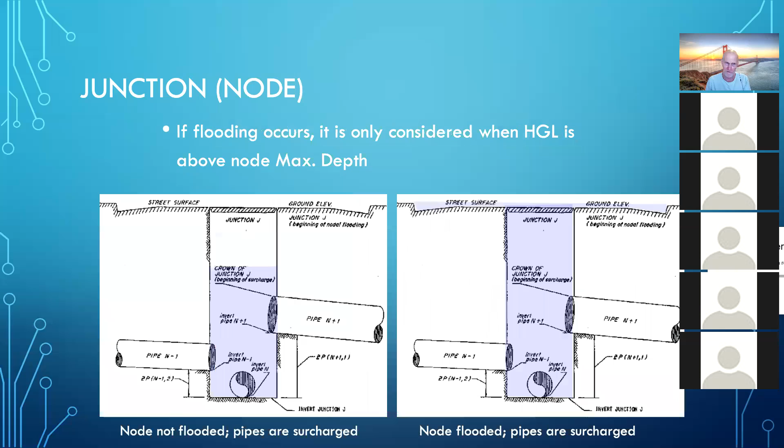Here is a sketch of flooding at an ordinary node. So imagine we have these pipes flowing here, and as the water comes up in the pipe, it goes above the pipe crown or the soffit elevation up into our system. And here they're showing hydraulic grade lines joining different places. In this particular one, here's the rim elevation at a manhole, and the water has come partway up the manhole, but it's not exiting out onto the surface. And we handle that with offsets, and we've seen that already.

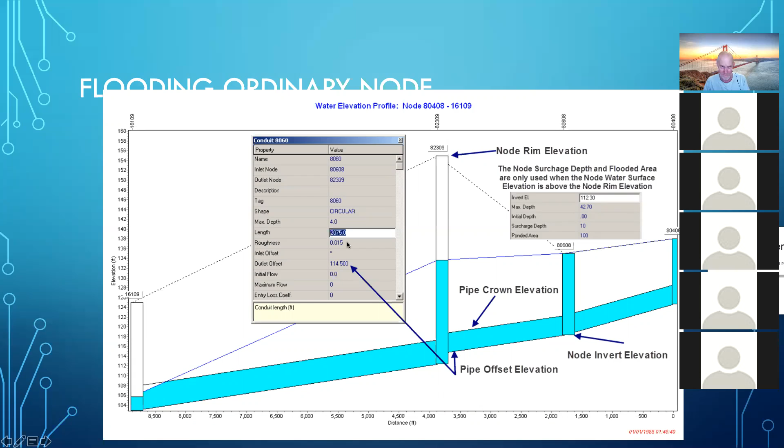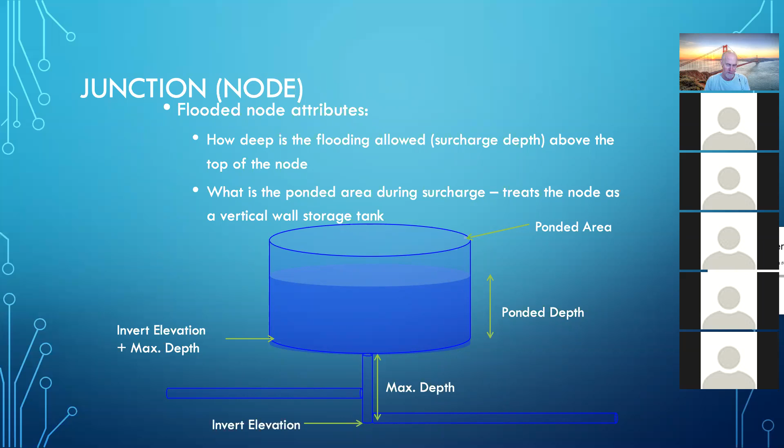Then we go to a junction node where we allow flooding, and that's flipping a switch, and that switch is how deep is the flooding allowed and what's the ponded area. So that's our next complexity of conceptualization. And then we're going to go to a different type of node entirely called a storage unit or a storage node. A storage node explicitly considers storage at the node, and it can include the subgrade portion of the node.

The storage node attributes that we supply are the same as an ordinary node plus a depth-area relationship. We have a choice of a tabular depth-area relationship, which is usually the most useful, or a functional depth-area relationship, which is, in my opinion, of less practical use, but it's okay to start with because we can get everything running and then go back and replace it with a tabular representation. The tabular one's the most useful and probably ultimately the practical one, but functional has its place.

And these can be used for detention ponds, which is what we'll examine today, modeling multiple level inlet and outlet hydraulics, keeping track of riser inlets and an outlet that has a portion through a pipe or a portion over a weir or another pipe at a different elevation. And those bullet items will make a little more sense when we see a graphic.

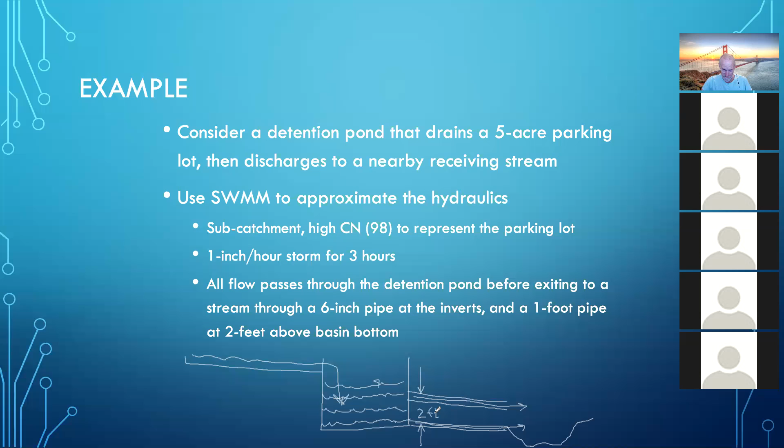Then at some point, the water gets high enough that it starts to go down the upper pipe. This distance, in this particular example, is 2 feet. So that's what our problem statement is trying to express to us. The mental picture here is somewhat important. Sometimes you have to draw sketches like this to understand what you're trying to do.

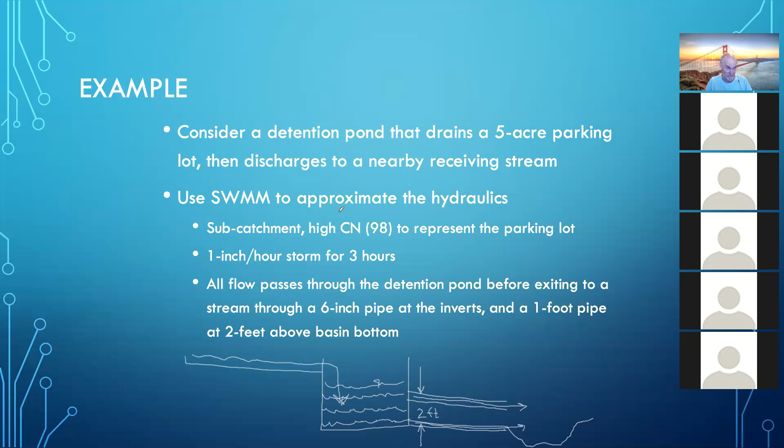In the case of our hydraulic model, we will let these two flows join each other at an ordinary node, a certain distance downstream of the pond, and then make its way to the outfall. So our components are Puffy the Cloud, sub-catchment, a node, which will be our detention pond node, 2 conduits, 1 foot and 6 inch. The 1 foot has at least an inlet offset of 2 feet, and I'm drawing it here with an outlet offset of 2 feet. We'll see if we preserve that.

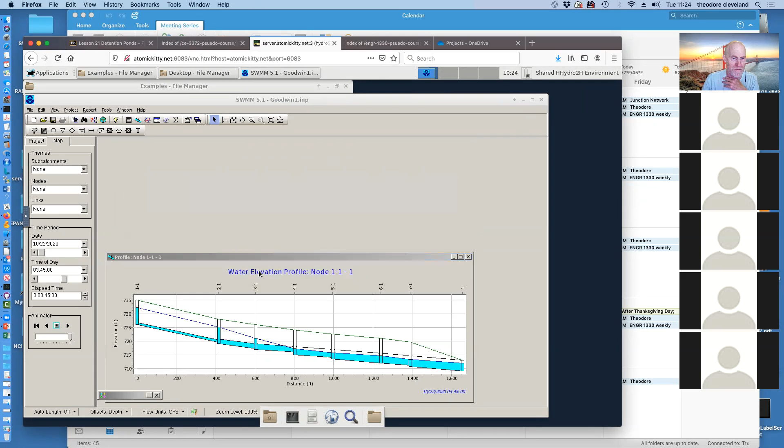Oh, this is not my usual computer. Okay, SWMM projects. Examples. We have example 1, example 2. So let's go here and get those data for the detention pond.

I need the input file. Right click. Okay, how do I undo this? No, I don't want to do that. We just want to download the damn link. That'll work. Make a new folder. There we go.

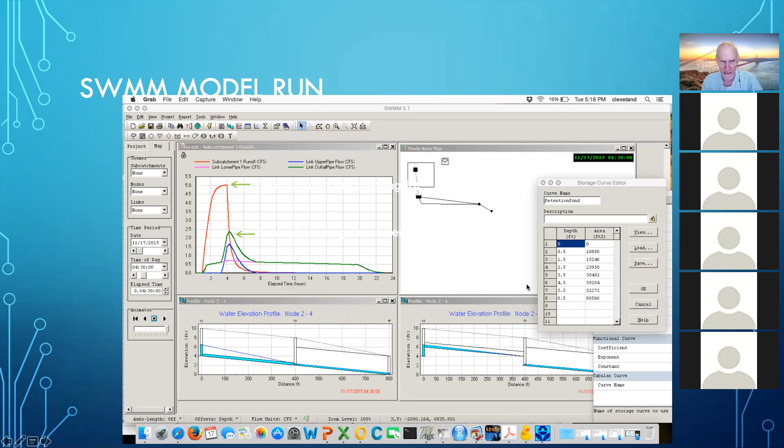Let's look at a different one. You're going to have a homework assignment coming up soon. That's literally this. It's based on a detention pond in Harris County.

For the SWMM program, we need to supply the area associated with different depths in the pond.

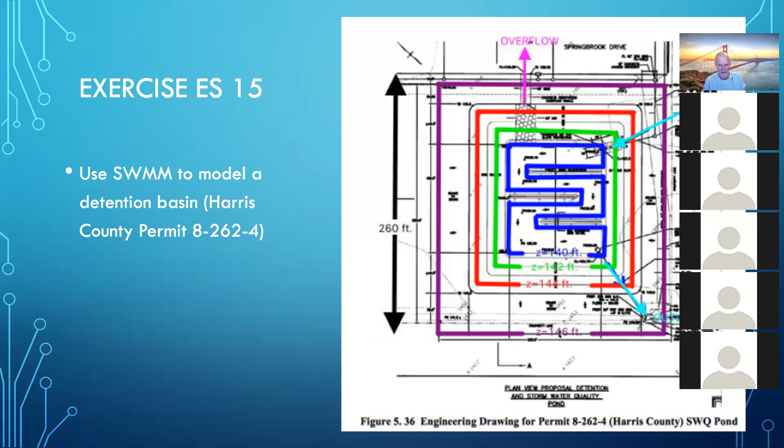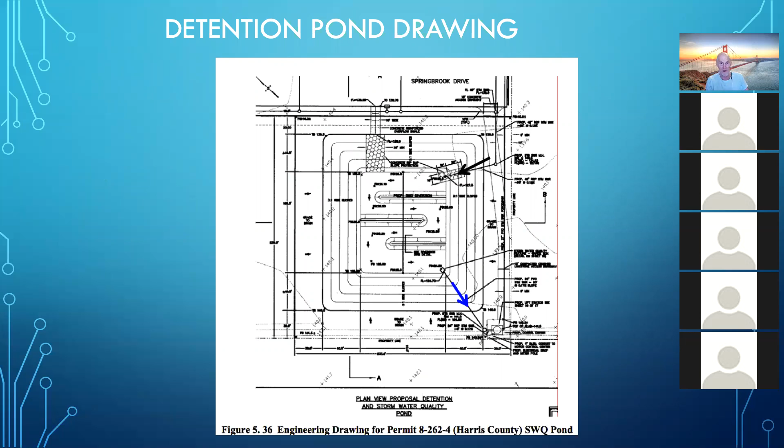In side view, here is a sketch of the pond system. It has a bottom of 139 feet, flow coming in, and then there's an exit pipe at 4 inches, a different one at 6 inches, 8 inches, and then an overflow channel. These values are taken from a problem statement, but the real pond only has 2 exits. Starting from the drawing, this is what we would start with. You have to study the drawings pretty carefully to figure out where the outlet is, unless you have the original drawing big enough to see what's going on. So we have inflow here, outflow here.

We use that to determine the depth area of the pond. The easiest way is to choose an elevation, find the pool area associated with that elevation, and then record the depth and the area. Usually the depth would be in feet, the area in square feet, unless we're doing HEC HMS or HEC RAS, where we'll do the area in acres.

So here's the first one. We have a pool elevation of 140 feet, and the water pool would look like that blue object right there. We would need to measure the area of that in acres or square feet. We measure acres, then convert to square feet, it's real easy.

The tool we would use to measure this area is the same as when we were measuring areas for the hydrology part - Acrobat Pro or something. You just measure the area of the enclosed object in some units and compare it to a known unit, and that gives us the pool area. The nice thing about rectangular ones is you can almost do them on a hand calculator.

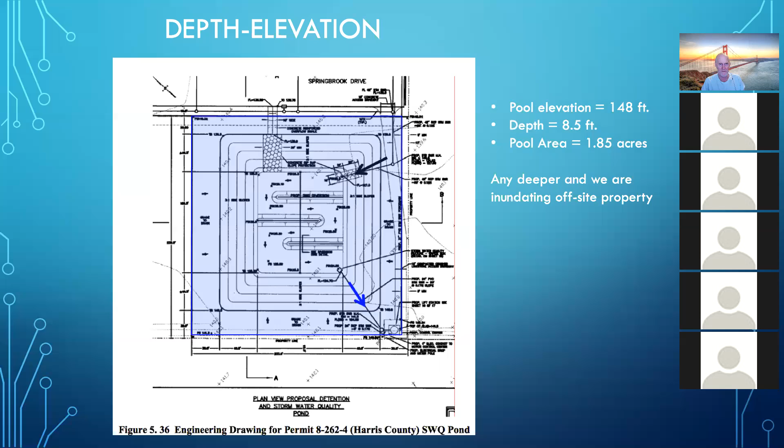So all we're doing is getting the surface area associated with these different water levels. Once we have that, we can enter the information into SWMM and apply rainfall to simulate the pond filling and draining outflow hydrograph.

I think I have that example built already. This one. Okay, it's going to be right there. I'm going to have to remember what the name of it is. Oh, it's not on this computer. That makes it even harder. So let's see if it's on this one.

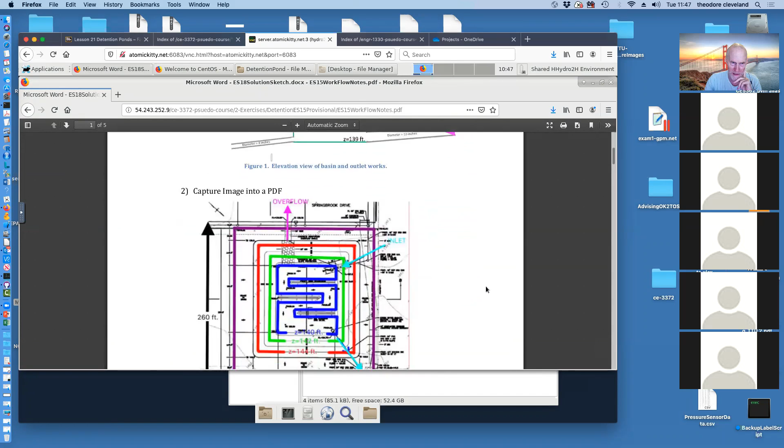Our next step would be to capture the image into a PDF, which is done, and then use measurement tools to find the area of the big square and then the other squares as we move to different elevations. Then we'll make this conversion table - we've measured these elevations, which correspond to these particular depths above the bottom of the pond. We've got an area here in acres, converted to square feet, and we'll put the square feet and depth into SWMM.

So here's our SWMM model, which we'll go to in a second. Then, using some of the problem-supplied values, we can explore the behavior of that detention pond.

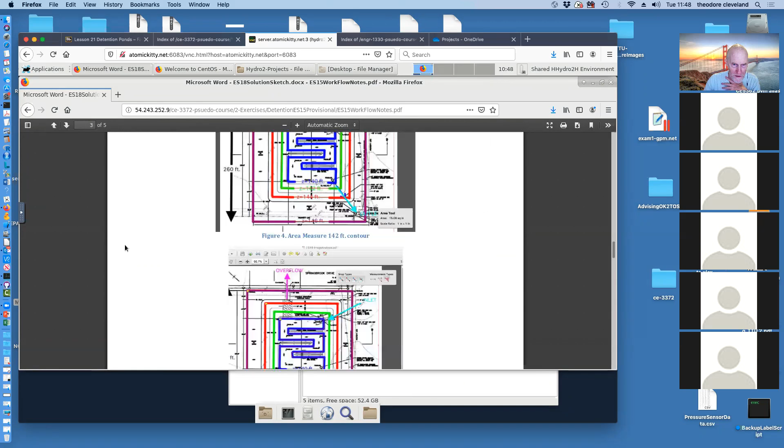Let's create a new folder. I really need to give it the right name. I don't have it handy, so let's go get it back from here. 8-262-4.

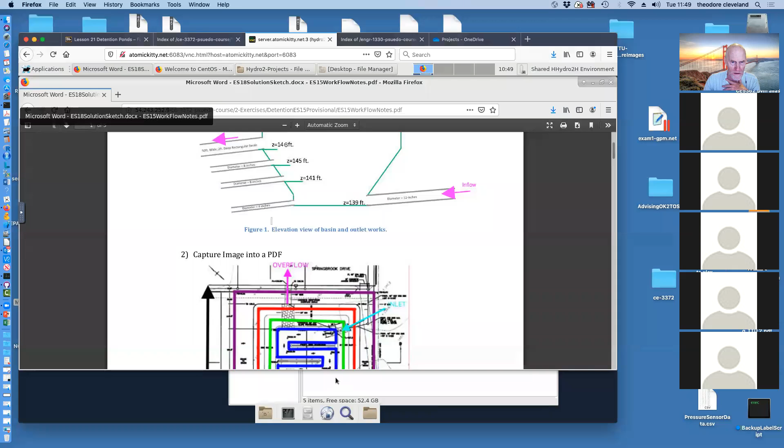Okay, and then we will go and grab the input file. Unfortunately, I don't have a base map to use, otherwise I would, because we can't load the PDF into SWMM and have it work.

Okay, so we'll start SWMM again, and now we'll look at our other detention pond. And there's the detention pond, let's go look at the parts. Now, if we had all the information on a piece of paper, building this is not all that hard.

What we're doing here is economizing on time, we have it already built. If we wanted to modify it, that's not hard either. This gives us the building blocks to make as complicated a network as we need to.

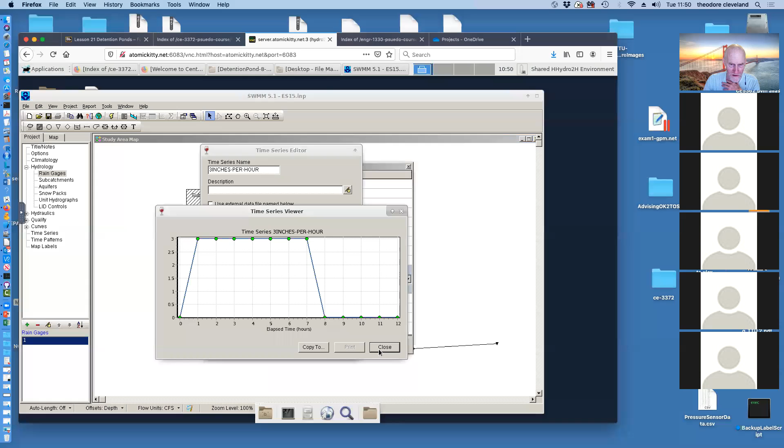So we'll go look at our rain gauge. This is a 3 inch per hour storm for 6 hours. So that's a pretty good storm, even in Harris County that would be uncommon.

And we'll look at our subcatchment, which is a watershed, 9 acres, and this is supplied elsewhere in the problem statement. The percent impervious is taken care of, and that routes to our storage unit.

So you can either consider the storage unit to be the watershed. Actually, this first storage unit is the watershed, the second one is our detention pond. We connect to it through a 1-foot pipe, which I think is what the drawing had. Yep.

Using a storage basin to represent a whole watershed is also a common trick, because that lets us keep storage on the watershed and then drain it into our system, or we could direct connect.

This is the pipe that connects to our detention basin. And if we look at our detention basin, its invert elevation is set at 139 feet. It has a tabular storage curve, we'll investigate that in a second.

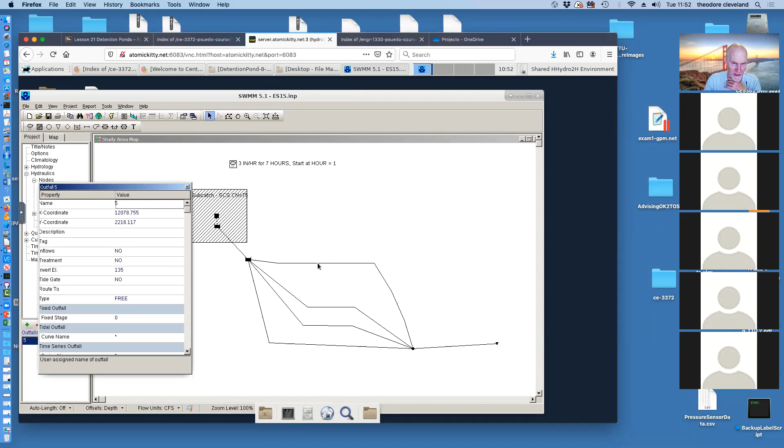And so all this downstream stuff could be changed to fit a broader network. This first part is just to get our detention basin working the way we anticipate it should. Here's the overflow swale, represented as an open rectangular, 2 foot deep, 50 foot wide.

And then our first... oh, somebody has decided to join me. Then our first conduit, our 8-inch diameter circular one. Our second one, also 8-inch circular. Our third one, a quarter of a 4-inch diameter.

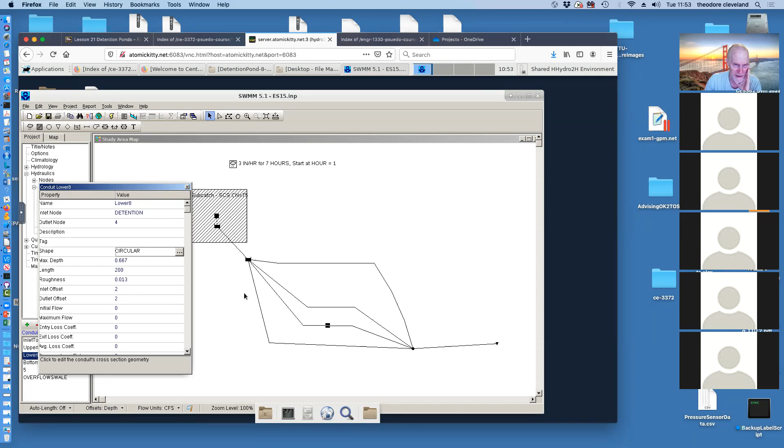And if we examine the offsets, the 4-inch has no offset. The lower 8-inch has a 2-foot offset inlet and outlet. The upper 8-inch has a 6-foot offset inlet and outlet. And the swale has a 7-foot offset inlet and outlet.

So if we were to create a profile, and let's see what it comes up with. It's going to do the upper 8. Should be good enough. Let's do another profile.

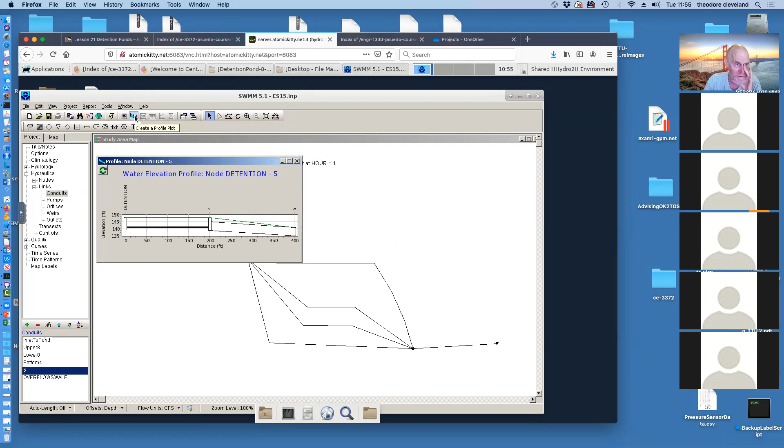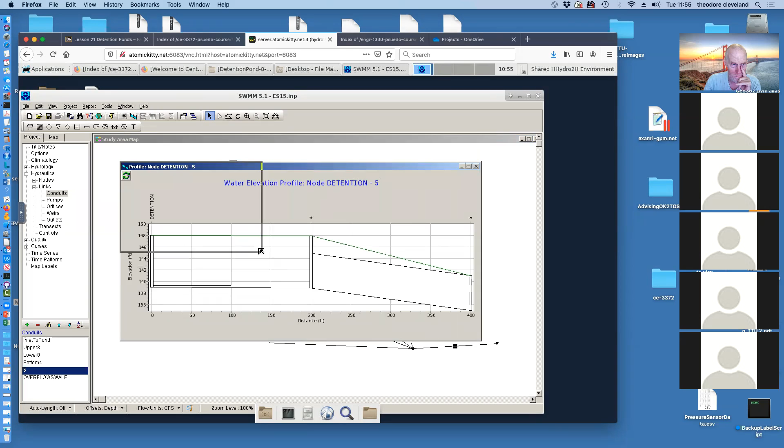And one more profile, we'll get the bottom. So there's our 3 profiles.

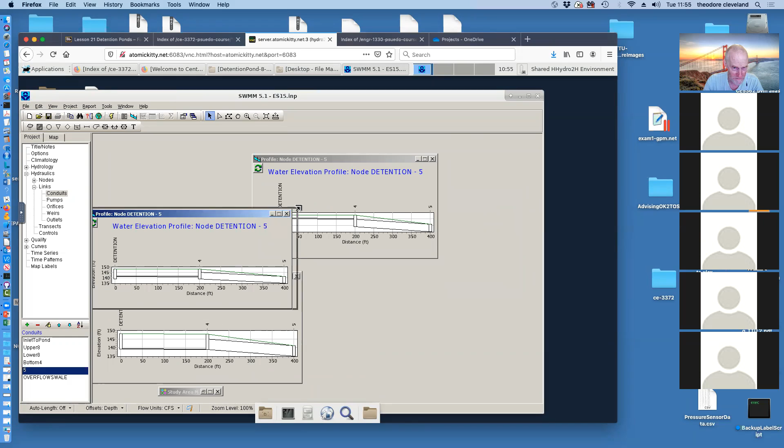And the trick becomes how to organize them so that you can visualize. So that's our bottommost one, let's make it about that size. Our second bottommost one. Then our... all right, that should be viewable.

So now we run our simulation. It's completed. Let's see what we just did before we move on: rainfall runoff, flow routing, dynamic wave, 23 hours with 5-minute and 15-minute time steps, ignoring inertia, Froude number, Hazen-Williams, EXTRAN.

So that's what we ran, and now we'll go. So now our storm begins, rainfall begins. Rain, rain, rain, rain, rain.

And then runoff begins, and you'll notice that our detention pond is taking on water. We can't see this well here as I wanted to. There we go, that'll work.

The bottom pipe is pretty much carrying flow almost right away, which makes sense since it's at the invert. And we don't see blue down here because that pipe is so big, the flow thickness is too low for it to be able to render in the graphic.

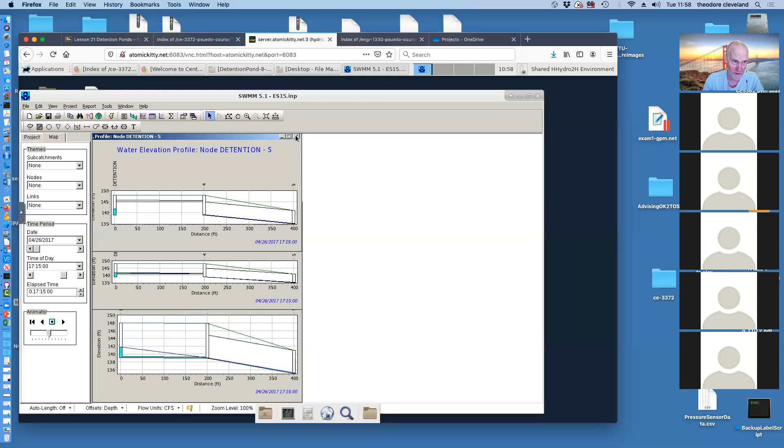So the only real piece remaining would be pumps, and I will find some examples of pumps in SWMM and present them a week from now, Tuesday a week from now, and then we'll move into collection systems. Sanitary collection systems - most of the computational tooling that you would need has been presented. So you had EPANET for pressurized systems, SWMM for open systems, and you've seen little pieces of bigger systems demonstrated.

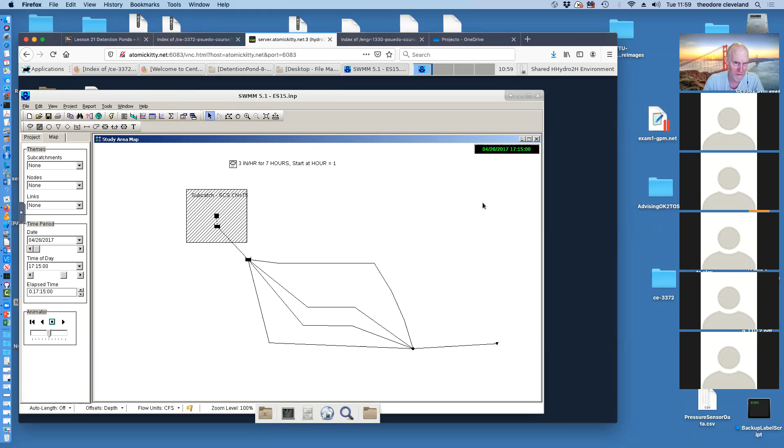And we can look at a fairly extensive one if I can find it. Spend a lot of time going in circles, don't we? Okay, I wonder if lesson 20 had it... that does not have the one I was looking for.

I have one of the Marsha Sharp Freeway here in Lubbock. That's a pretty extensive SWMM model, and that would be a good one to show all the different parts working together. But I don't think I have it handy. So what am I for time? I got 20 minutes to go.

Not that one. We'll see if we can't find it, get it uploaded, because it's worth looking at. File, new window. MSF.

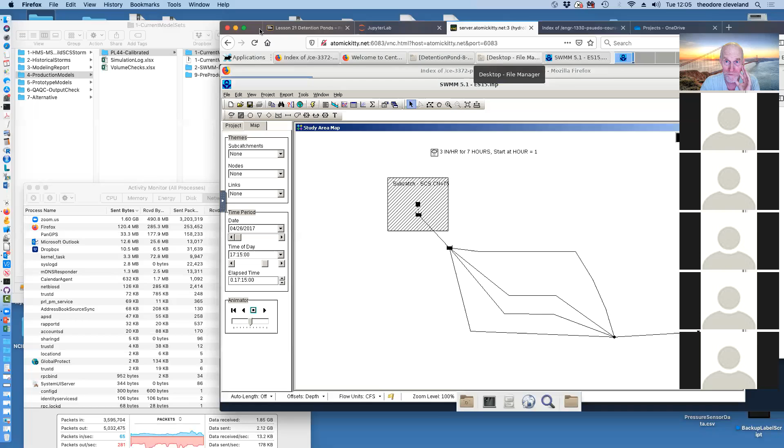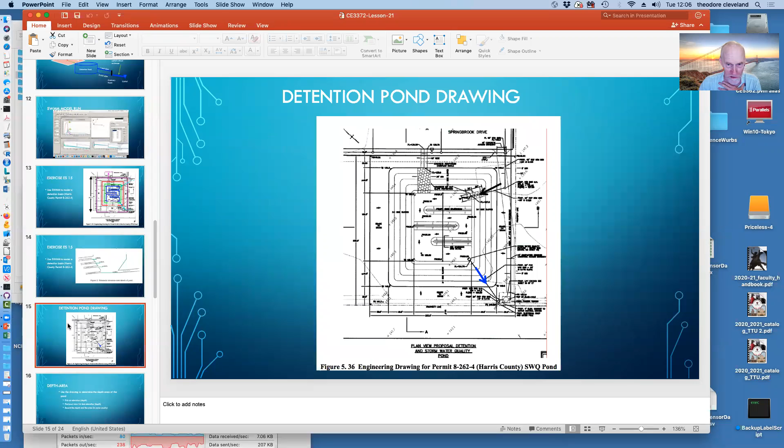I was referring to the one on the screen. Okay, let's go ahead and we'll do that. Let me get all the support materials I need to have handy. So even though I make it look like I do this stuff willy-nilly, I actually don't. So I'm going to need... oh, I don't have the table handy.

I'm going to need the depth area information, so I'm going to ask you to let me cheat a little bit here. Let me take that. Copy that, and then I need a place to write it. Oh wait a minute, it's just a text file - let me put it right here. Okay cool, it's on the clipboard.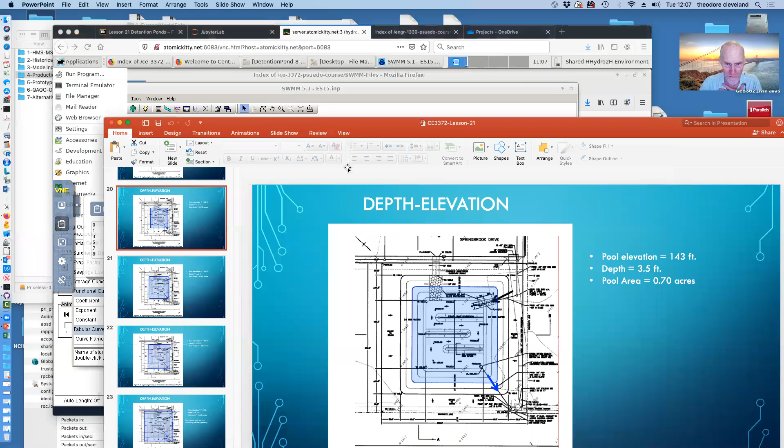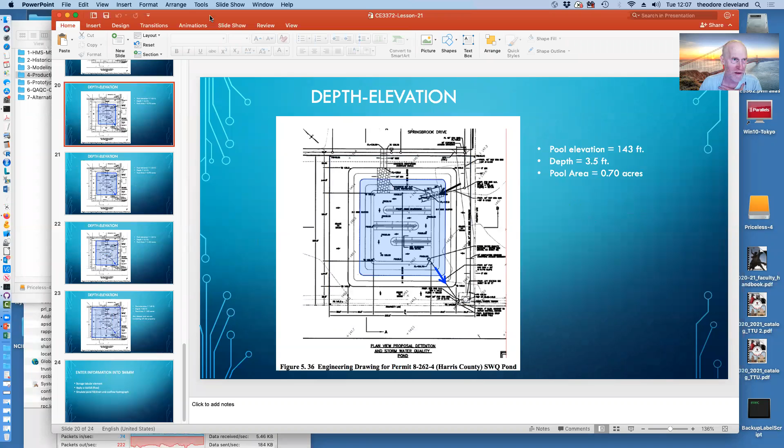So what I put to the clipboard is this is the depth column, and then this is the ponding area that's associated with the different elevations here. So as the pond goes up, look on the right, you see the depth is increasing. Actually, I guess I could do it directly from this, except I still have to convert acres into square feet. So okay, we can rebuild from scratch.

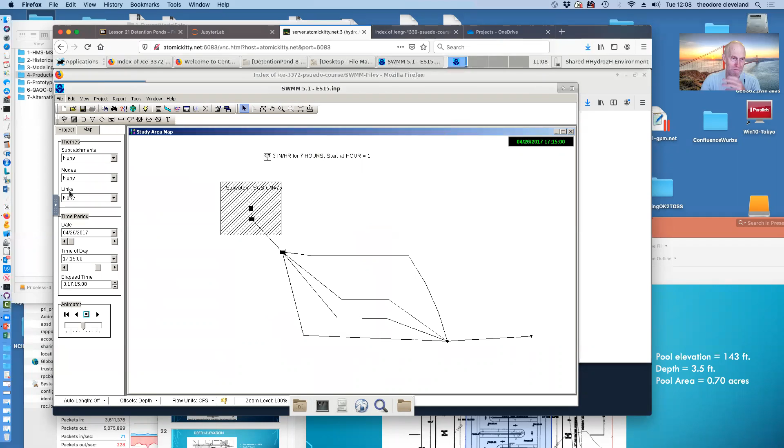So I don't want to clear that - that's in case I screw up. So in case I mess up, I have everything as a backup. So file, exit. Sure.

So we'll start SWMM. We're going to build a brand new one. Let's give it a name - we're going to call this 8-262-4 live.

And I guess I need the rest of the problem statement. I don't know what the drainage area is, so I will start with a drainage area. There's my drainage area, and we'll parameterize that shortly. Then we're going to have our storage unit. And we'll have another one certain amount downstream, and we'll connect that to our outfall.

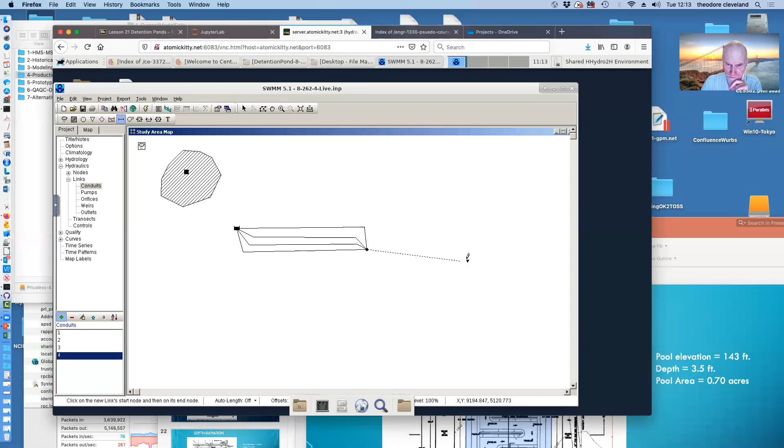So I'm taking advantage of the drawing tool to let me draw things that are in some sense parallel so I can see them. And I'm not going to put the rectangular in right now because I don't think I need it. I might as well just do it. Okay, so that's all connected.

Let's take our subcatchment and we'll just do the defaults, but the outlet is going to be storage unit 2. Rain gauge is going to be the one and only one that we have. Let's see what we have to choose from. We have 1. And everything else we'll just leave as is for the time being.

So you notice this dashed line is connected to our outlet. So in this case, everything is going to go into this storage unit. Keep in mind, I don't have a separate storage unit to represent the watershed storage yet, and you'll see what the impact of that is when we run the simulation. Next, we need to set our rain gauge up, intensity.

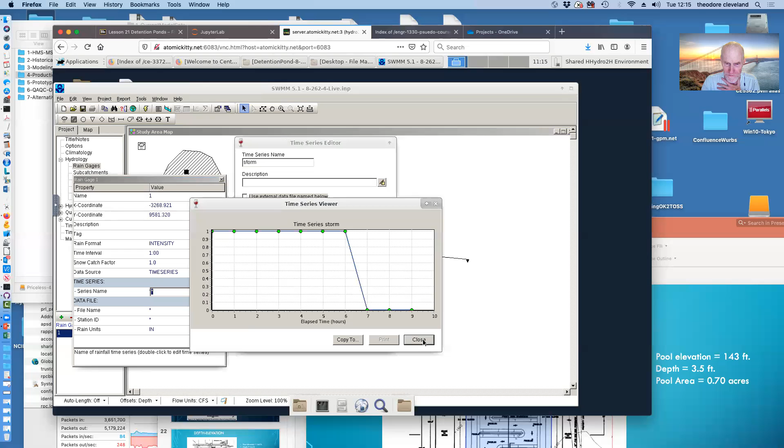So there's how we set the times, and then I think I was using 1 inch per hour. I'll actually just start everything at 1 inch per hour. 1, 2, 3, 4, 5, 6. I think 3 hours should be enough to drain it. Take a picture of it. Inch per hour until hour 6, and then it drops to 0 at the end of hour 7. She's okay.

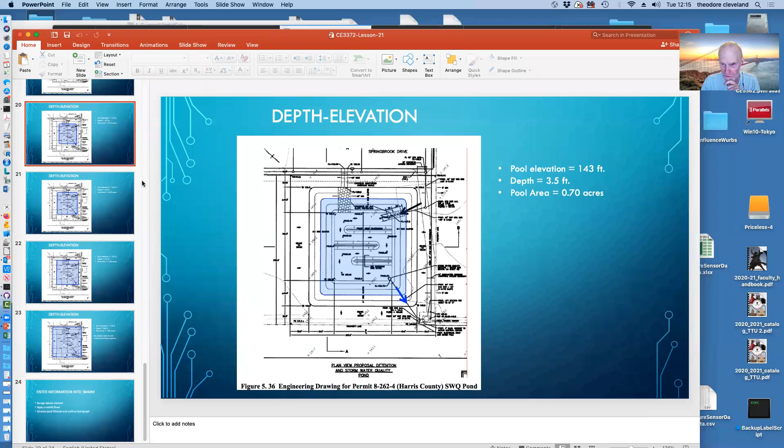So our rainfall's been taken care of, and next we have to deal with invert elevations. So let's go back at our initial analysis. Our invert elevation would be 139.5. That would be at 0 depth, 139.5. And let's let things get to 10 feet deep.

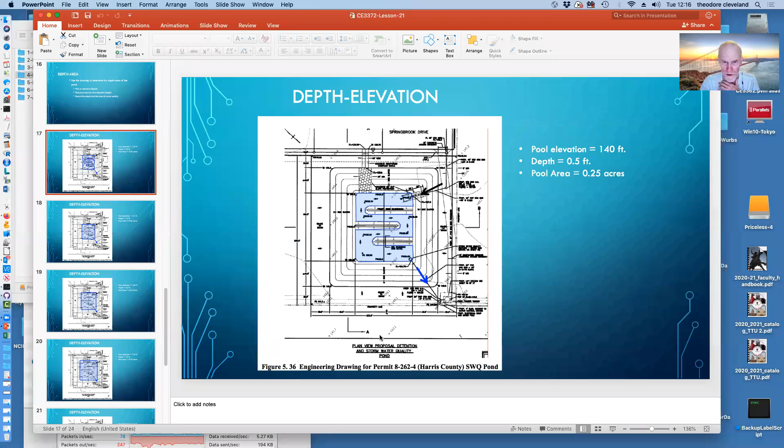And we will have a tabular storage curve at some point. And we need to give it a name: my pond. So something like that to get the depth, and then we have to supply areas. And that's where we would, again, refer back to our analysis. So at a depth of a ½ foot, we're at a ¼ acre, so that's about 10,000. 43,000, quarter, that's 10.

So there's our ½ foot, 1 foot deep, 1½ foot's 0.35 acres, and so on. This is where I'm going to actually exercise my privilege of cheating. And so 1 foot deep, I'm at 9,743.

At 3 feet deep, I'm at 19,410. 5 feet deep, 32,130. 7 feet deep, 67,600.

And between 32 and 67, we could interpolate if we wanted to. Let's just make it 43,560. So that's a full acre right there. Between 19 and 32, be 25,000. And then this ½ footer, the 1 foot's the one we're going to need to jack with. 9,000 and 19,000, 9 and 5 is 14.

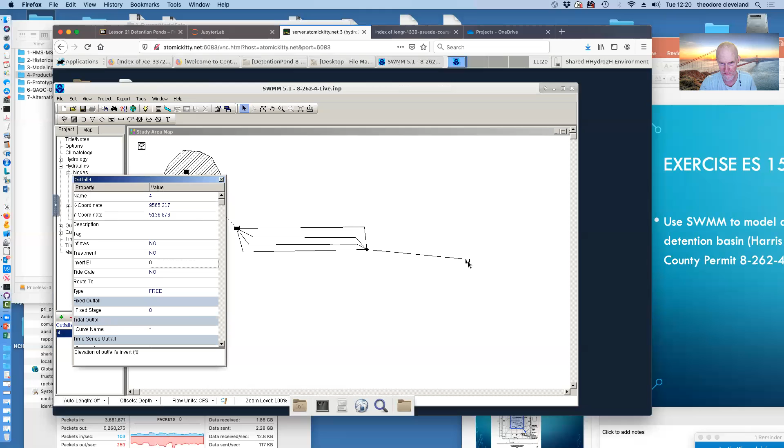Set this elevation, something like that. And I'm making numbers up now. So we're not ready quite yet, but we can attempt a simulation, see if we have broken pieces. Actually, that's pretty amazing. Let's look at this bottom pipe, and that makes sense. Pretty sure the top one will have no flow in it.